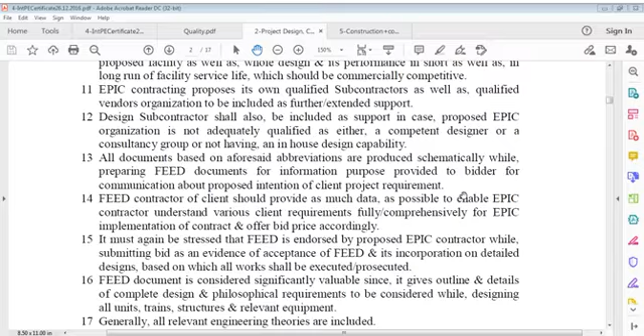As an engineer, as a designer, as a speaker, as a writer, I have authority on my education, I have authority to think on, I have authority to design, I have authority to accept myself, I have authority to amend that self, according to my caliber, according to my competency. I can go a long way, and that's why I say FEED and contract. Doesn't mean construction contracting. Contracting means design also. Contracting means art also. Contract means on which track I move with someone else.

Let's say a railway track, it has 2 rails, it has cross sleepers, and it's a system that works together, on which a very heavy train moves. Only if these are derailed can you say it's failure of that system, but until it works, it's a system. Both wheels of the bogie run on this track, and they can't be derailed while it works. Same way, a contractor, a designer or an owner, they all work on those tracks, and that is called a system.

So we should not think of it differently. We have to comprehend our views into contemplation. We have to comprehend our views that come out of thinking, thoughtful exercises, and they can be collectively called templates, though unpapered, not on paper. We can't read them, but we have to apply them.

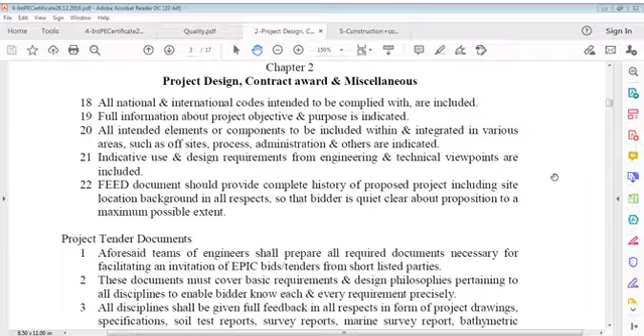So the FEED document should be comprehensive enough to communicate the message of what was wanted by those people who own this project, what they thought of, what was the contemplation, and this communication must be written somewhere, and direction of design must be given based on those elaborations, those writings or those contents. It's very much an issue.

So FEED cannot be taken for granted, and should not be, because FEED is front end. I say front end design, rather I should say front end engineering design, because engineering comes into play, though there can be pre-FEED, and that shall be the front end of design start. We have to give proper value to design, to the world of design, to time of design, to requirement of design. What is really required is this.

So these points we have to understand very well, and then we come to tender documents. It's also very important. Tender document. After all, why tender? My question is, why tender? And what is tender? Why do we need it? Why is tender required?

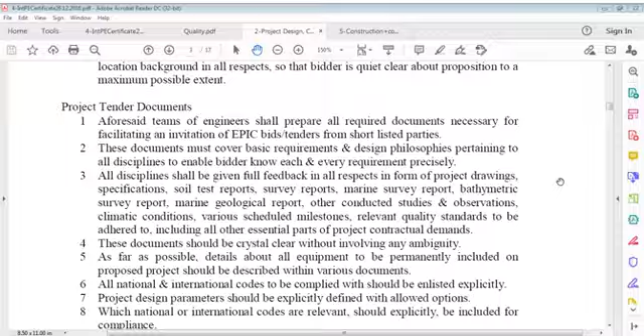These documents must cover basic requirements. That's what I say. These documents must cover basic requirements and design philosophies pertaining to all disciplines to enable the bidder to know each and every requirement precisely. Because if a bidder doesn't know the precise requirement, how can that person calculate cost on that? If our precise requirement is absent, this means that the bid document is defective, and we have to raise questions before these documents are accepted.

Bid is accepted. These documents must cover basic requirements as I have written and design philosophies pertaining to all disciplines to enable the bidder to know each and every requirement precisely, I mean to say completely. It should not be an indicative one, it should be expressed in a proper way. That's what I say. Bid document. Now, again I say these documents must cover basic requirements and design philosophies pertaining to all disciplines to enable the bidder to know each and every requirement very precisely.

All disciplines shall be given full feedback in all respects in the form of project drawings. Right? The drawings themselves are very big, voluminous. Even for a small building, you will find complete sets of drawings, architectural drawings. First of all, before architecture, there will be a site plan, location plan or layout plan as well.

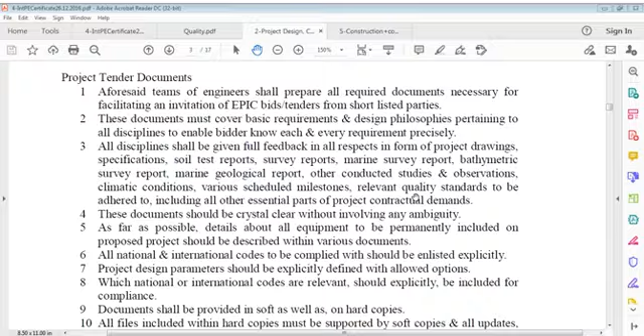These are all important points that those people can think about. And thinking is required. As I said, thinking is required, which is very, very important. Now, we say again, as the paragraph states, all disciplines shall be given full feedback.

All disciplines shall be given full feedback in all respects in the form of project drawings, specifications, soil test reports, survey reports, marine survey report, bathymetric survey report, marine geological report, other conducted studies and observations, climatic conditions, various scheduled milestones, relevant quality standards to be adhered to, including all other essential parts of project contractual demands.

These documents should be very crystal clear without involving any ambiguity. It is a must. Every document must be clear and relevant to the project requirement. I don't want to include useless documents. I don't want to include useless information. What is relevant is relevant. That's why having superficial documents has no meaning. You must have limited documents with complete information.

We should not leave any unclear, or you can say loose documents, which are not relevant to the project, and unnecessary increased volume should not be used. If you don't understand this point, we cannot compile documents. So these documents should be crystal clear without involving whatever level of ambiguity. That is not going to work at all.

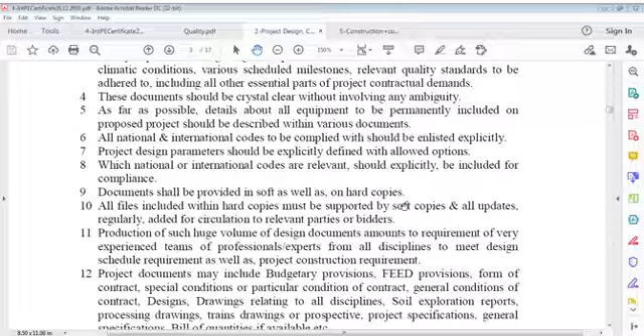So as far as possible, details about all equipment to be permanently included on the proposed project should be described within various documents. And of course, national and international codes are a must to be complied with, and these must be enlisted explicitly, that we will refer to these codes for whatever purpose. And project design parameters should be explicitly defined with allowed options. So which national and international codes are relevant should explicitly be included for compliance, and that compliance must be made a must. It's not simply written, it should be worked upon.

Documents shall be provided in soft as well as hard copies. That's very normal. All files included within hard copies must be supported by soft copies, and all updates regularly added for circulation to relevant parties or bidders.

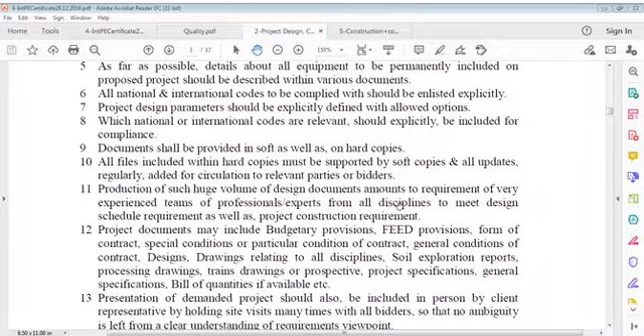Production of such a huge volume of design documents amounts to a requirement of a very experienced team of professional experts from all disciplines to meet design schedule requirements as well as project construction requirements. Production of such voluminous documents requires those professionals who can work upon this. Those professionals are engineers in general, engineers from all disciplines, to meet design schedule requirements as well as project construction requirements.

Project documents may include budgetary provisions. Yes, of course, budgetary provisions are a must. How can we move without budget provisions? No one can move. So project documents may include budgetary provisions, FEED provisions, because budget comes first, FEED comes second. Budgetary provisions, FEED or project provisions, and also others, I can say without any slip here.

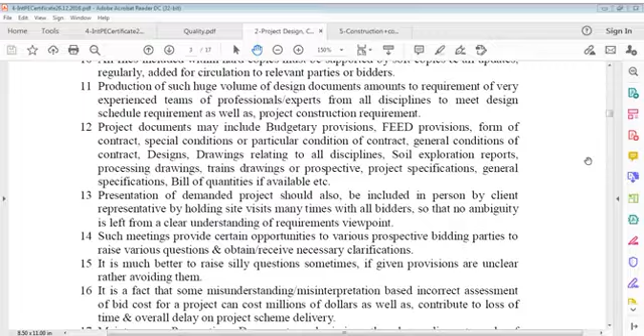Alright, now we can't stick to one point. We have to move further to soil exploration and others, and process drawings. Therefore, my dear friends, we can define very briefly what these are. Project documents may include budgetary provisions, FEED provisions, form of contract, special conditions or particular conditions of contract, general conditions of contract, designs, drawings in relation to all disciplines, soil exploration reports, process designs or drawings, trains drawings or prospective project, specifications, general specifications, bill of quantities if available, etc. Then we can go further.

Presentation of demanded project should also be included in person by client representative by holding site visits many times with all bidders so that no ambiguity is left from a clear understanding of requirements viewpoint. It should be a crystal clear presentation. There should be nothing left which the contractor doesn't understand. Contractor understanding must be very clear because it is that person who shall deliver to you your requirement. If that person is not clear, how can you get your requirement? So the contractor from this field understands this.

Presentation of demanded project should also be included in person by client representative by holding site visits many times with all bidders, so that no ambiguity is left from a clear understanding of requirements viewpoint, which is very important in such engineering. Such meetings provide certain opportunities to various prospective bidding parties to raise various questions and receive necessary clarifications.

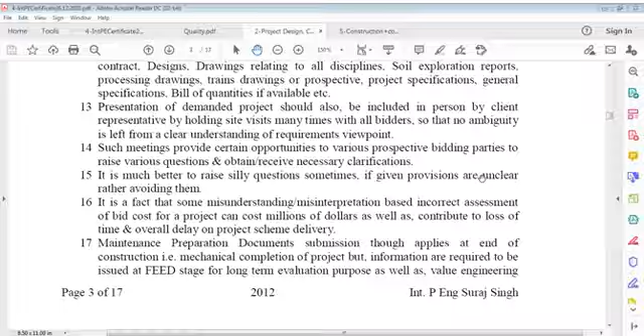Now, what do we say? We talk about contractors' obligations pertinent to maintenance preparation, general engineering and procurement, which the contractor shall take into account in its design of the proposed facility, its maintainability criteria, philosophy and requirements of spares to be defined in the proposed FEED design package.

What do you say? Obligations. What's the obligation of the contractor? Maintenance preparation, general engineering and procurement, which the contractor shall take into account in its design of the proposed facility, its maintainability criteria, philosophy and requirements of spares to be defined in the proposed FEED design package. Now, this is a very important point.

Important not from a construction point of view, but from an installation point of view, from the performance point of view of trains. This actually means trains and vessels. When we say maintenance preparation, mostly that means all equipment that you have to include within this project. A long list of equipment, very long and very expensive, whatever processing plant or furnace, and technology-related equipment, and we have to learn a lot about that, and you can learn a lot on this.

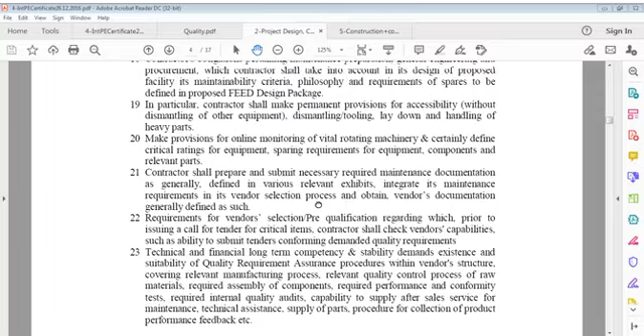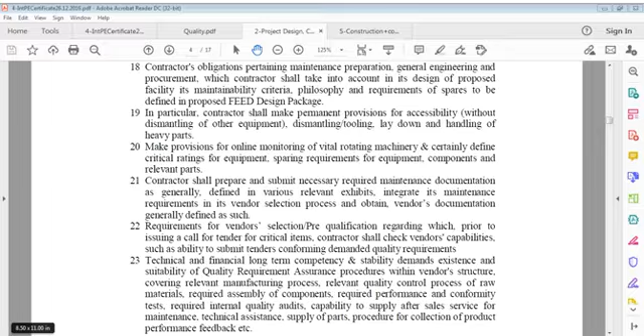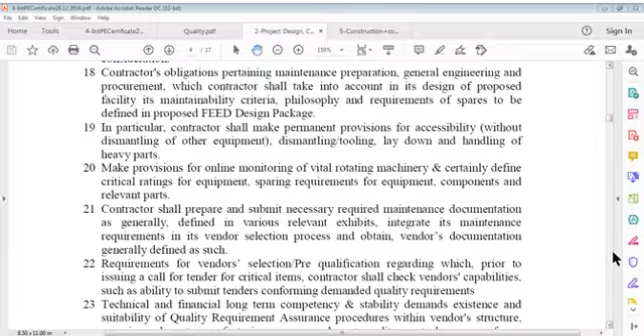Contractors' obligations pertaining to maintenance, preparation, general engineering and procurement, which the contractor shall take into account in its design of the proposed facility, its maintainability, criteria, philosophy and requirements of spares to be defined in the proposed FEED design package. Very important point.

Means maintenance, preparation, general engineering, procurement, which the contractor has to do according to the design of the facility, its maintainability, criteria, philosophy and requirements of spares, which all need to be defined in the design package. And permanent accessibility for maintenance without dismantling, without interfering in the process, and also where is laydown, handling of heavy parts. All this must be taken into consideration.

And of course, provisions for online monitoring of vital rotating machinery, certainly define critical ratings for equipment, sparing requirements for equipment, components and relevant parts. Contractor shall prepare and submit necessary required maintenance documentation as generally defined in various relevant exhibits.

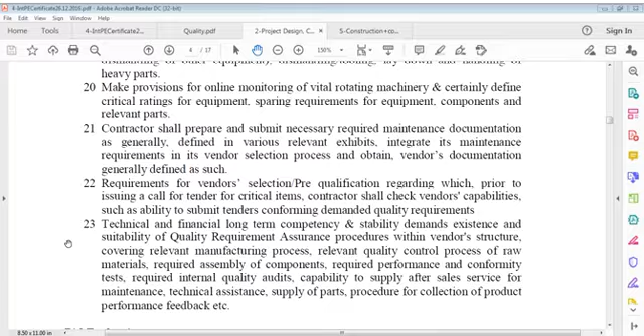Vendors' documents would tell, would advise, would suggest how to maintain, the complete process of maintaining, how to handle, how to operate, everything like that, in descriptive mode, explanatory mode, pointed mode, and all solutions: which problems may be faced by these equipments, what shall be the solutions, what shall be indicators of problems, as you find even in small equipment we buy these days, electronic equipment, electric equipment; we buy and we find this all written in a data sheet or catalog or literature.

Requirements for vendor selection, pre-qualification, regarding which prior to issuing a call for tender for critical items, contractor shall check vendors' capabilities such as ability to submit tenders conforming to demanded quality requirements. It's very important. Pre-qualification is a term, or you can say vendor's capability. Pre-qualification means we define criteria that the vendor should have. Just like normative references we define, minimum requirements we define, and these can be submitted in the form of pre-qualification, but that should be factual, it cannot be imaginary.

And of course, inspections and examinations can be done at various locations of the vendor, wherever the vendor works, whether it's offices, warehouses, factories, their design office and all that. This can be verified, inspected, assessed. And that requirement is very important.

Paragraph is requirements for vendor selection, pre-qualification, regarding which prior to issuing a call for tender for critical items, contractor or bidder shall check vendors' capabilities, such as ability to submit a bid conforming to demanded quality requirements, technical and financial long-term competency and stability, and existence and suitability of quality requirements.

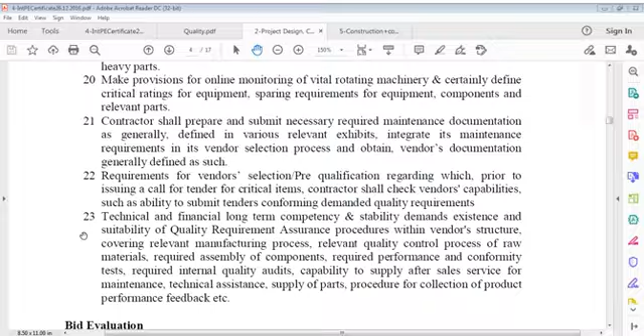These points are very important, meaning competency: technical competency, material competency, money competency, standard competency, requirement competency, quality competency, assurance competency, your structure competency meaning company structure, organizational structure, manufacturing process competency, quality control competency, quality requirement competency, quality standard competency, assembly competency, performance competency, conformity test requirements, internal quality audits, external quality audits, after sales services capability, technical assistance, supply of parts, procedure, collection of product performance feedback, etc.

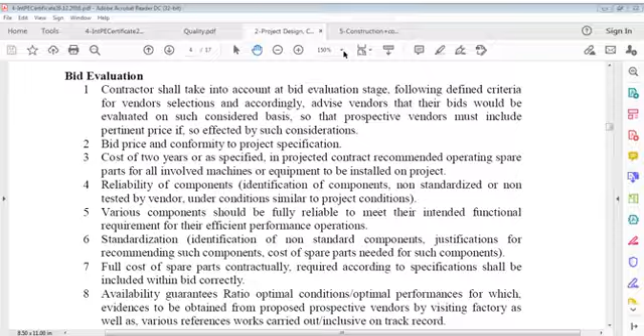Now, bid evaluation. What is bid evaluation? That is an important part. After all, it is a bid. It's not official. It's something secret, price-wise, and it's something very much technical. It's not price-wise alone. It's technical. And technical investigation is very much important. It's very difficult. It's very cumbersome. And it has to be analyzed.

Analysis of all documents. I'm not saying word by word, but effect by effect. Effect by effect means how does it affect this and that. That point is very important. Quality everywhere. We have to make sure that quality is everywhere, meaning in these documents also. These documents are based on certain design, certain views, performance, time, reliability, analysis, thinking, and that works there. And of course, it is related to certain construction projects, organizational management.

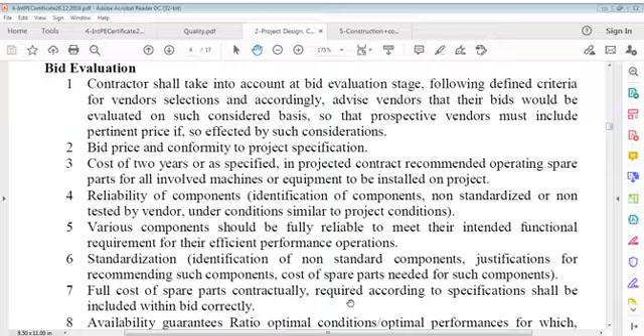Bid price and conformity to project specifications. Now, cost of 2 years or as specified in projected contract recommended operating spare parts for all involved machines or equipment to be installed on project. Reliability of components. Identification of components non-standardized or non-tested by vendor.

Bid price and conformity to project specification and cost of 2 years spare parts. Reliability of components means identification of components non-standardized or non-tested by vendor under conditions similar to project conditions. Various components should be fully reliable to meet their intended functional requirements for their efficient performance operations.

Standardization is identification of non-standard components, justifications for recommending such components, cost of spare parts. You can say standardization, identification of non-standard components, and justifications for recommending such components, cost of spare parts needed for such components, full cost of spare parts contractually required according to specifications.

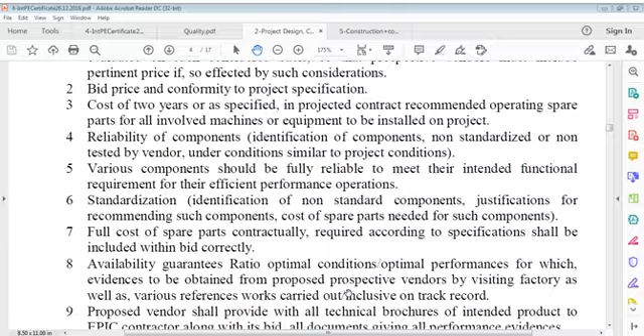And availability guarantee ratio, optimal conditions, optimal performances, for which evidence to be obtained from proposed prospective vendors by visiting factory, as well as various reference works carried out inclusive of track record.

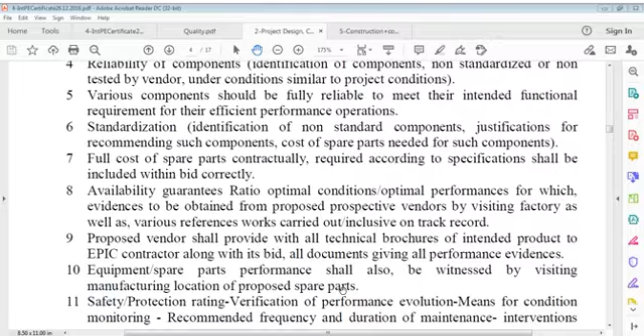Proposed vendor shall provide all technical brochures of intended product to EPIC contractor. Now we can fill in again. Proposed vendor shall provide all technical brochures of intended product to contractor along with its bid. All documents giving all performance evidences, equipment, spare parts, performance shall also be witnessed by visiting manufacturing location of proposed spare parts.

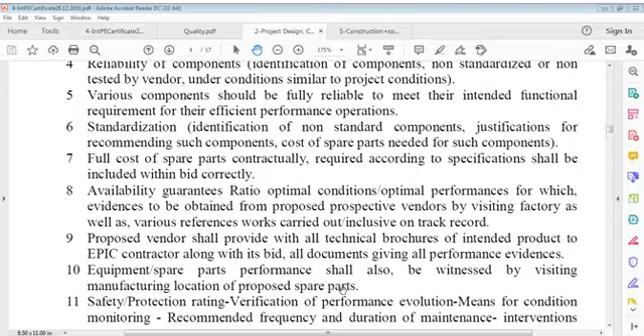Safety protection rating, verification of performance, evaluation, means for condition monitoring, recommended frequency and duration of maintenance interventions, total annual duration, maximum duration of major intervention.

Similar records should be confirmed from available database of past successful projects, on history of vendor's track record, and included within submission to contract engineer as an evidence to monitor proposed product efficiency.

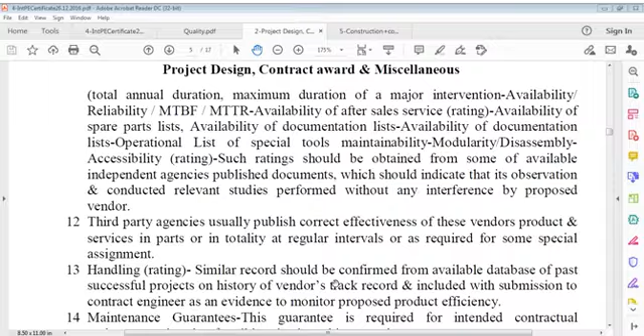So we can say maintenance guarantee. After handling rating we have to talk of maintenance guarantee. This guarantee is required for intended contractual maintenance duration for all involved machines, equipment, etc.

Then we may say maintenance guarantee. This guarantee is required for intended contractual maintenance duration for all involved machines, equipment, etc.

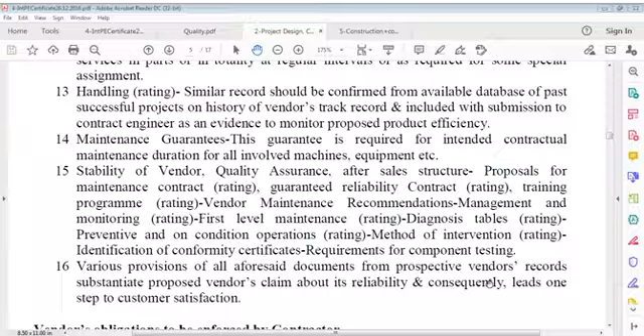Let us say one by one again. Handling, maintenance guarantees, stability, etc. And before handling, third-party agencies. Third-party agencies usually publish correct effectiveness of these vendors. Here we are. Yes, right.

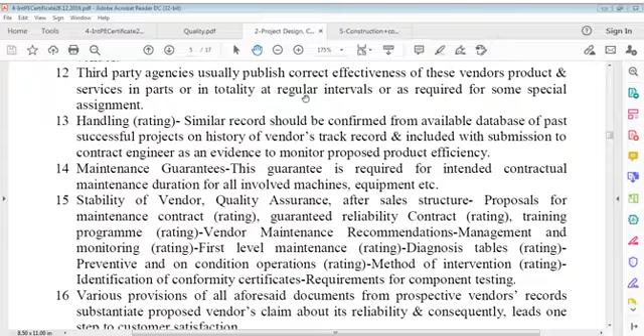Now, maintenance guarantees. This guarantee is required for the intended contractual maintenance duration for all involved machines, equipment, etc. Stability of vendor, quality assurance, after-sales structure, proposals for maintenance contract rating, guaranteed reliability contract rating, training program rating, vendor maintenance recommendations, management and monitoring, first level maintenance rating, diagnosis tables, ratings and

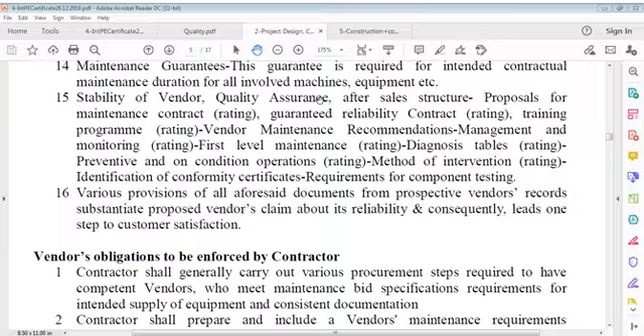preventive and on-condition operations ratings, method of intervention ratings, identification of conformity certificates, requirements for components testing. Various provisions of all aforesaid documents from prospective vendors' records substantiate the proposed vendor's claim about its reliability and consequently lead one step to customer satisfaction.

Vendor's obligations to be enforced by contractor. Contractor shall generally carry out various procurement steps required to have competent vendors who meet maintenance bid specifications, requirements for intended supply of equipment, and consistent documentation.

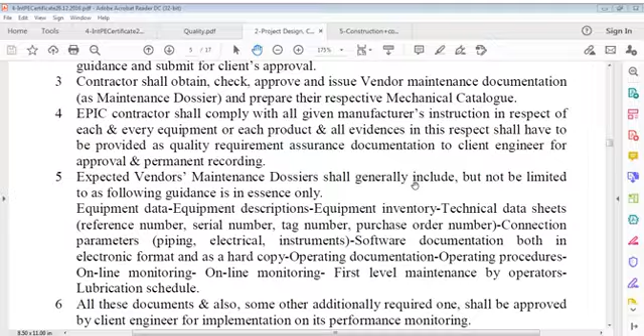Expected vendors' maintenance dossiers shall generally include but not be limited to the following, as guidance in essence only: equipment data, equipment descriptions, equipment inventory, technical data sheets, reference number, serial number, tag number, purchase order number, connection parameters, piping, electrical instruments, software documentation both in electronic format and as hard copy, operating documentation, operating procedures, online monitoring, first level maintenance by operators, lubrication schedule.

I repeat. Expected vendors' maintenance dossiers shall generally include but not be limited to the following, as guidance in essence only: equipment data, equipment description, equipment inventory, technical data sheets, reference number, serial number, tag number, purchase order number, connection parameters, piping, electrical instrumentation, software documentation both in electronic format and as a hard copy, operating documents, operating procedures, online monitoring, first level maintenance by operators, lubrication schedule.

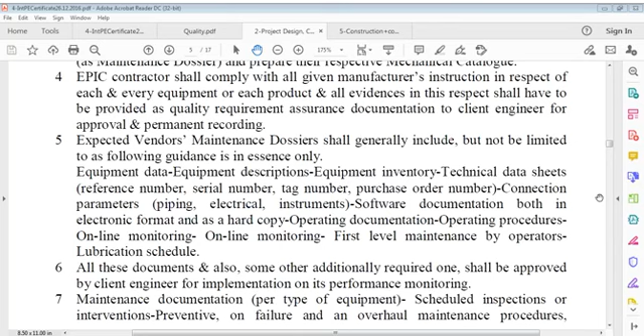All these documents and also some other additionally required ones shall be approved by the client engineer for implementation on its performance monitoring. Maintenance documentation: per type of equipment, scheduled inspections or interventions, preventive, on-failure and overhaul maintenance procedures, including description of personnel, tools, spare parts, drawings, required troubleshooting charts,

list of consumables, list of special tools, spare parts list (SPL) under format attached or equivalent, and drawings: general arrangement, section drawing, schematic and wiring drawings, control loop drawings, logic diagrams, cause and effect sheets. All these documents shall be properly numbered and recorded by the EPIC Document Center.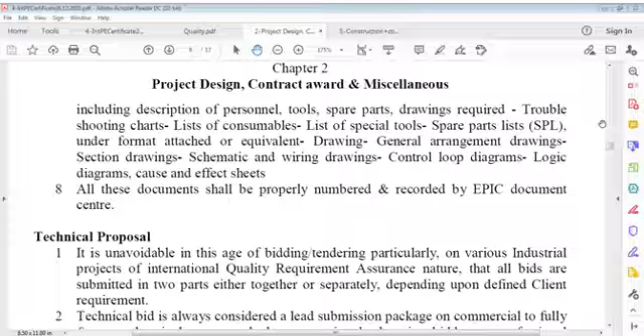Let us repeat this very important one, because this is related to vendors' obligations to be enforced by contractor, what vendors require, and these are various issues related to equipment, the requirements.

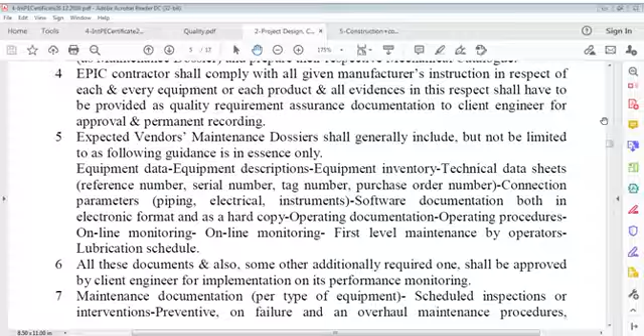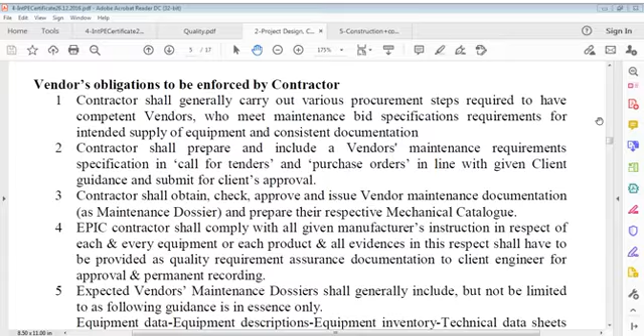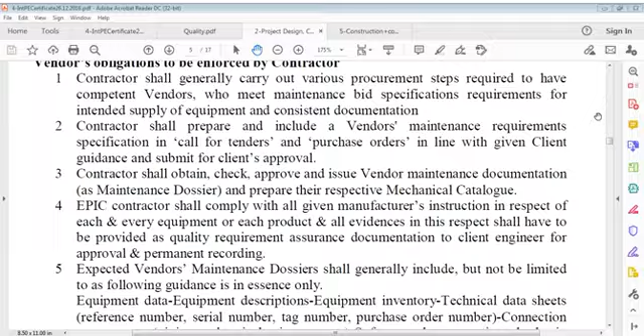It's a very important point in this case, and I'll speak only on one point, not all. It says in this case, I'll just read: the contractor shall generally carry out various procurement steps required to have competent vendors who meet maintenance bid specification requirements for the intended supply of equipment and consistent documentation. Contractors shall prepare and include a vendor's maintenance requirements specification in calls for tenders and purchase orders in line with given client guidance and submit for client's approval. Contractors shall obtain, check, approve, and issue vendors' maintenance documentation as maintenance dossiers and prepare their respective mechanical catalog.

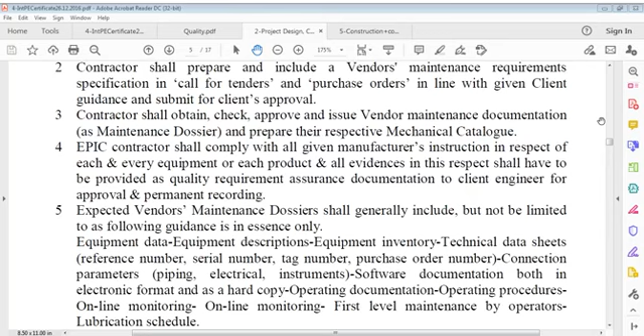EPIC contractors shall comply with all given manufacturer's instructions in respect of each and every equipment of each product, and all evidences in this respect shall have to be provided as quality requirement assurance documentation to client engineer for approval and permanent recording. Expected vendors' maintenance dossiers shall generally include but not be limited to the following, in its essence only: equipment data, equipment descriptions, equipment inventory, technical data sheets, reference numbers, serial number, tag number, purchase order number, connection parameters, piping, electrical, instruments, software documentation both in electronic format and as hard copy, operating documentation, operating procedures, online monitoring, first level maintenance by operators, lubrication schedule. All these documents, and some other additionally required ones, shall be approved by the client engineer for implementation and performance monitoring.

Maintenance documentation per type of equipment, scheduled inspection or intervention, preventive, on-failure, and overhaul maintenance procedures, including description of personnel, tools, special parts, spare parts, drawings required, troubleshooting charts, list of consumables, list of special tools, spare parts list under the format attached or equivalent, drawings: general arrangement drawings, section drawings, schematic drawings and wiring drawings, control loop diagrams, logic diagrams, cause and effect sheets. All these documents shall be properly numbered and recorded by the EPIC Document Center.

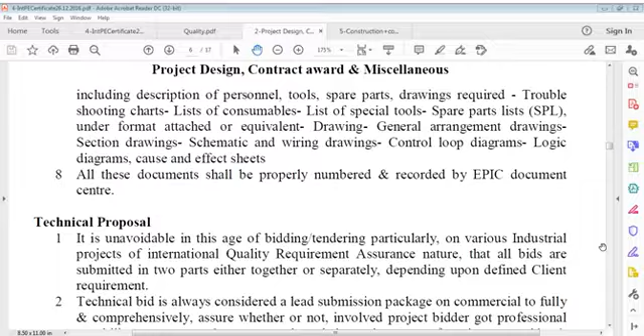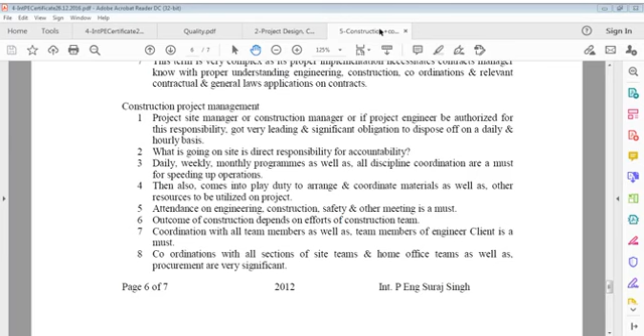The third important part here is the technical proposal, which is, you can say, the foundation of this type of contract. Before this, I would like to say construction control, which is also

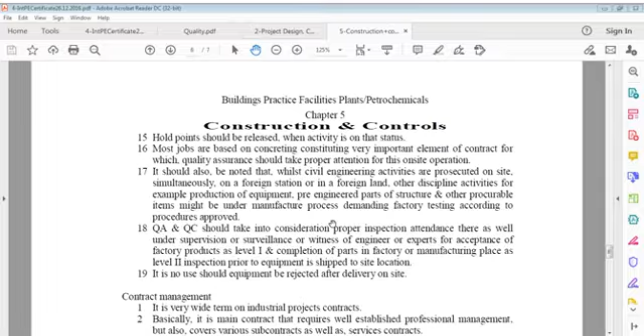I actually wanted to discuss this, but there's some obstruction coming in. We'll take care of this as well, no problem.

So first let's go to the technical proposal, which is very important from each and every point of view. The technical proposal is very, very important for contractors, for tenderers, for project engineers, and for owners, for all. Without having a competent technical proposal, nothing can be relied upon. To be very frank, nothing can be relied upon.

Now, it's unavoidable in this age of bidding and tendering, particularly on various industrial projects of international quality requirement nature, that all bids are submitted in two parts, either together or separately, depending upon the defined client requirement, and the technical proposal is the lead document. The commercial bid can also be submitted with it, but even if it is, it has no meaning until the technical proposal is finalized. Even though commercially you are suitable, if technically you are not suitable, you are not eligible for the commercial bid. This is the entire meaning of that.

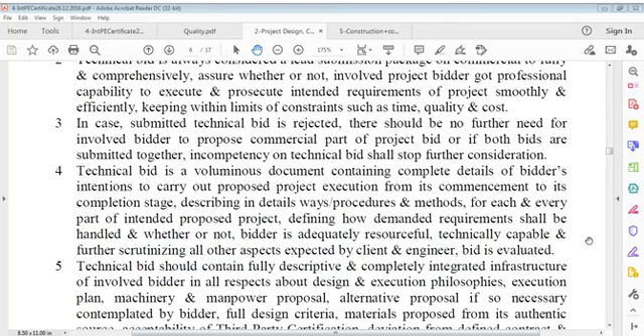In case the submitted technical bid is rejected, there should be no further need or requirement for the involved bidder to propose the commercial part of the project bid, or if both bids are submitted together, incompetency on the technical bid shall stop further consideration. Technical bid is a voluminous document, and if submitted through soft copies, it's a big memory document.

Technical bid is a voluminous document containing complete details of bidders' intentions to carry out the proposed project execution from its commencement to its completion stage, describing in detail ways, procedures and methods for each and every part of the intended proposed project, defining how demanded requirements shall be handled

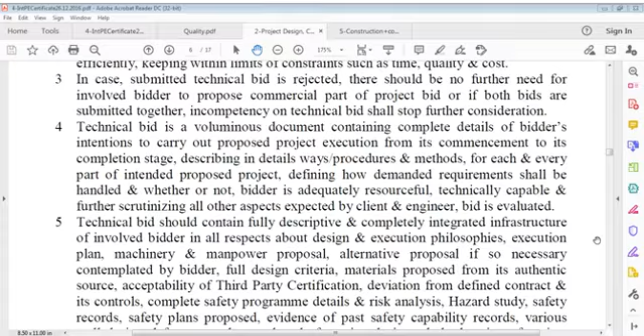and whether or not the bidder is adequately resourceful, technically capable, and further scrutinizing all other aspects expected by client and engineer. Bid is evaluated. Technical bid. Technical bid should contain fully descriptive and completely integrated infrastructure of the involved bidder.

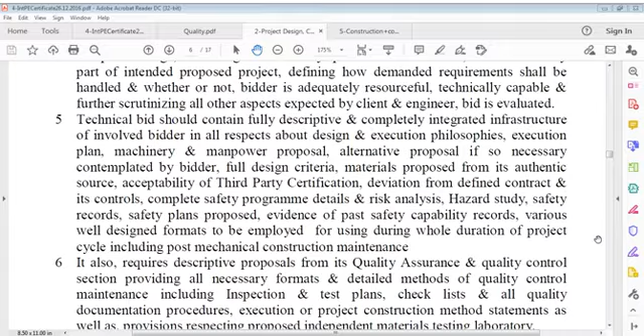Fully descriptive and completely integrated infrastructure of the involved bidder in all respects about design and execution philosophies, execution plan, machinery and manpower or workforce proposal. Alternative proposal, if so necessary, contemplated by bidder, full design criteria, materials proposed from its authentic source, acceptability of third-party

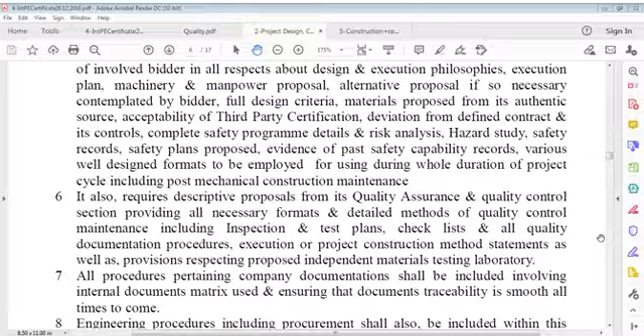certification, deviation from defined contract and its controls, complete safety program details and risk analysis, hazard study, safety records, safety plans, proposed evidence of past safety capability, records and various well-designed formats to be employed during the whole duration of the project cycle, including post mechanical construction maintenance.

It also requires descriptive proposals from its quality assurance and quality control section, providing all necessary formats and detailed methods of quality control, maintenance, including inspection and test plans, checklists, and all quality documentation procedures. Execution or project construction method statements as well as provisions respecting the proposed independent materials testing laboratory.

All procedures pertaining to company documentation shall be included, involving internal document matrix used and ensuring that document traceability is smooth at all times to come. Engineering procedures including procurement shall also be included within this proposal, giving complete feedback on the proposed designing system, software to be used, designer's potential, complete requirement of job related materials, job temporary facility to accommodate proposed manpower, etc.

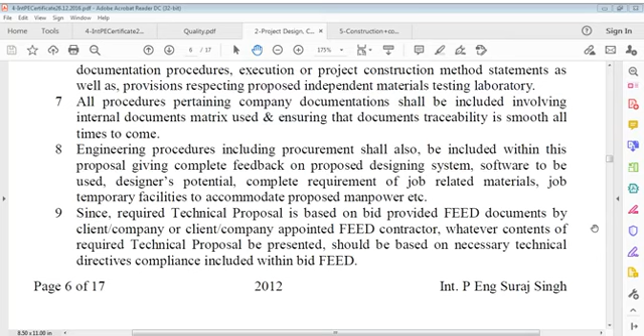Since the required technical proposal is based on bid-provided FEED documents by the client company or the client company appointed FEED contractor, whatever contents of the required technical proposal are presented should be based on necessary technical directives and compliance included within the bid FEED. Bidders' base firm proposal should not at all deviate from bid FEED requirements. Means the original bid should not deviate from FEED requirements.

A competent bidder is required to endorse the submitted technical bid stating that the given bid is completely based upon the provided FEED, meeting all requirements unconditionally without involving any qualifications. Its content of certification should be in accordance to the client format provided.

There may be an alternative proposal in addition to the bidder's firm proposal, which may satisfy all requirements of FEED in addition to contributing cost and time saving to the client according to defined value engineering considerations, that the owner client could accept if all proposals comply with provisions included within FEED.

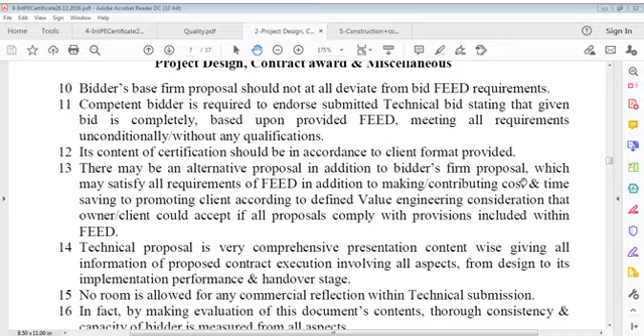Technical proposal should be a very comprehensive presentation content wise, giving all information of proposed contract execution involving all aspects from design to its implementation, performance and handover stage. No room is allowed for any commercial reflection within technical submission.

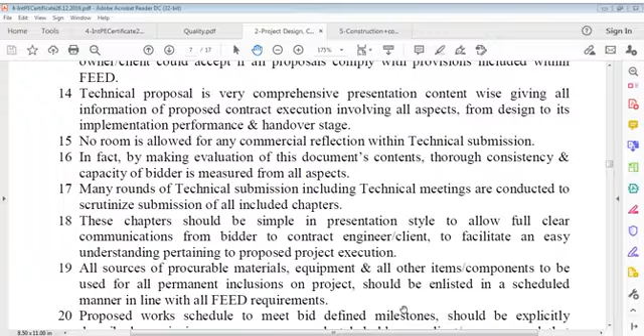In fact, by making evaluation of this document's contents, thorough consistency and capacity of the bidder is measured from all aspects. Many rounds of technical submission, including technical meetings, are conducted to scrutinize submission of all included chapters. These chapters should be simple in presentation style to allow full clear communication from bidder to contract engineer or client, to facilitate an easy understanding pertaining to proposed project execution.

All sources of procurable materials, equipment and all other items and components to be used for all permanent inclusions on the project should be enlisted in a scheduled manner in line with all FEED requirements.

Proposed works scheduled to meet bid defined milestones should be explicitly described, convincing everyone concerned, stakeholders and client company, that the bidder approach is feasible to achieve indicated or defined targets in practical terms, so that commissioning of the facility shall move smoothly without causing any problems.

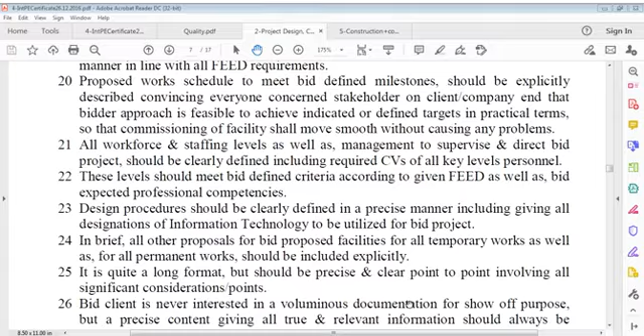All workforce and staffing levels as well as management to supervise the bid project should be clearly defined, including required CVs of all the personnel. These levels should meet bid defined criteria according to the given FEED as well as bid expected professional competencies.

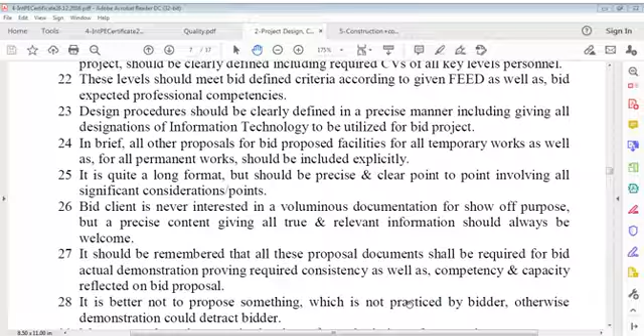Design procedures should be clearly defined in a precise manner, including giving all designations of information technology to be utilized for the bid project. In brief, all other proposals for bid proposed facilities for all temporary works as well as for all permanent works should be included explicitly.

It is quite a long format, but should be precise and clear, point to point, involving all significant consideration points. The bid client is never interested in voluminous documentation for show purposes, but a precise content giving all true and relevant information should always be welcome.

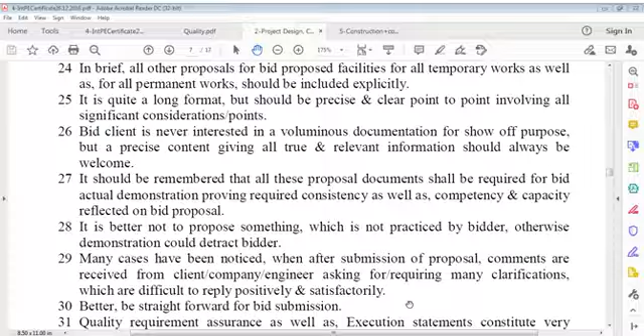It should be remembered that all these proposal documents shall be required for actual demonstration, proving required consistency as well as competency and capacity reflected in bid proposals. It's better not to propose something which is not practiced by the bidder. Otherwise, demonstration could detract the bidder. Very important point.

Many cases have been noticed when, after submission of the proposal, comments are received from the client company engineer requiring many clarifications, which are difficult to reply to positively and satisfactorily. Better be straightforward for bid submission.

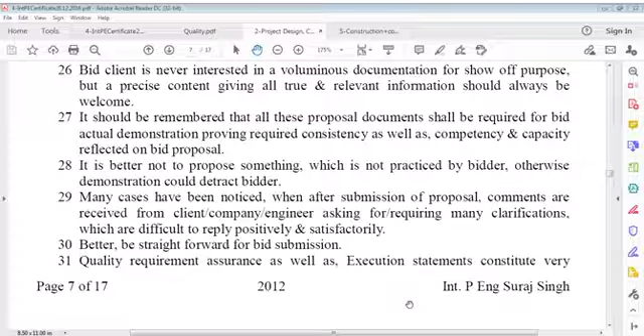Quality requirement assurance as well as execution statements constitute a very important and significant role for providing value to the project technical bid, for which due time and devotion must be given by the proposed bidder. Relevant experts should be engaged for detailed inclusion of all necessary information within bid documents for engineer, company, client consideration and review. Untoward information should be preferably avoided.

Once the project bidder is shortlisted, either by client or company engineer or by project establishment, a bid competency call for its commercial presentation should be given to the bidder, failing which there is no use in case the submitted bid fails to meet project FEED requirements.

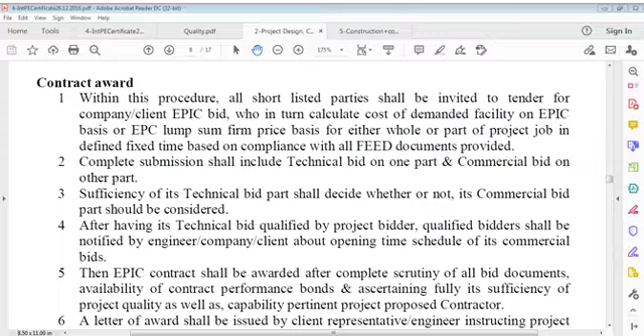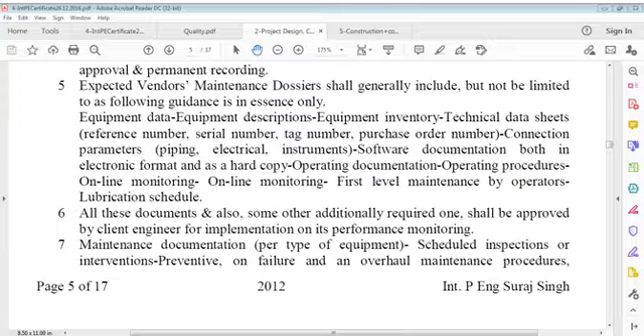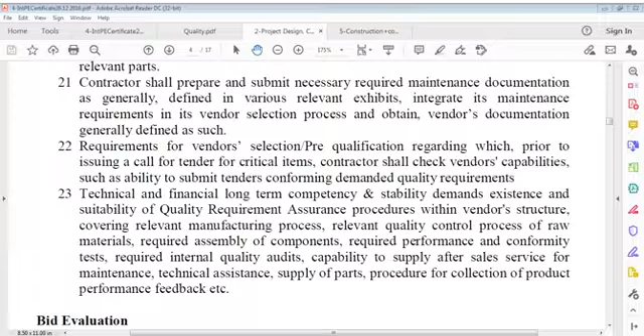We can say here, why does it go down? We're just talking about the technical proposal, and before that we talked about vendors' obligations to be enforced by the contractor, and before that bid evaluation, and documents. In this file we talked about abbreviations first. There is project design, contract award, miscellaneous. Then with evaluation we started, which is a very important one. Before this we had FEED documents.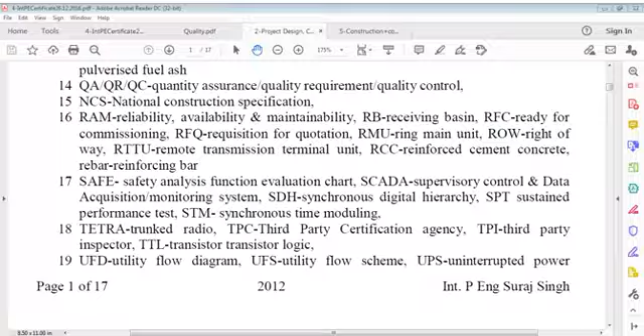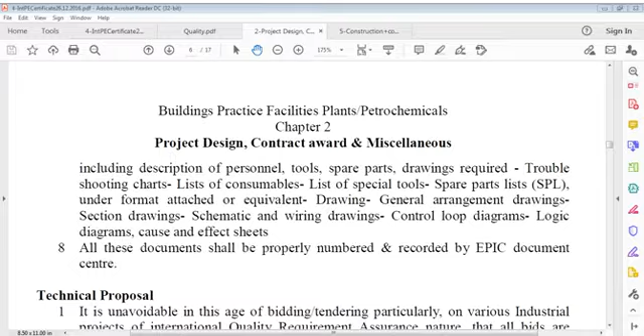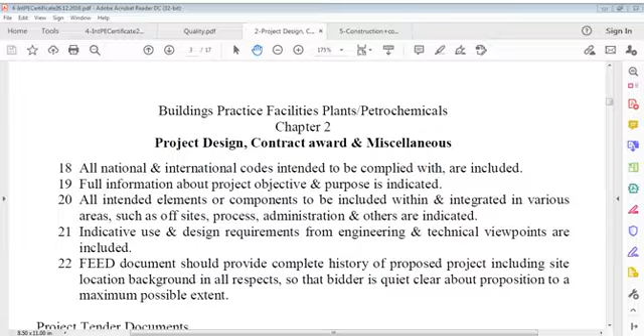It doesn't go further. It goes like this, I think. Like that. Okay.

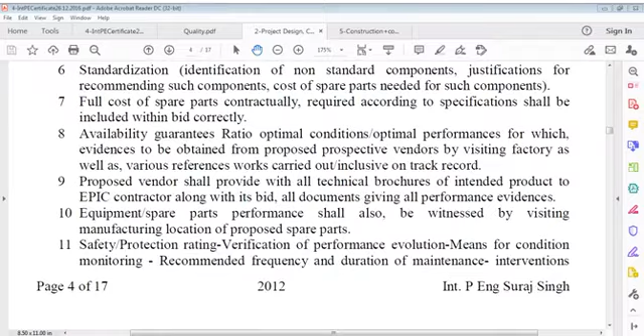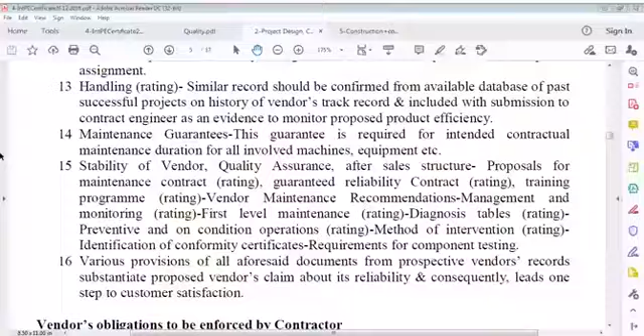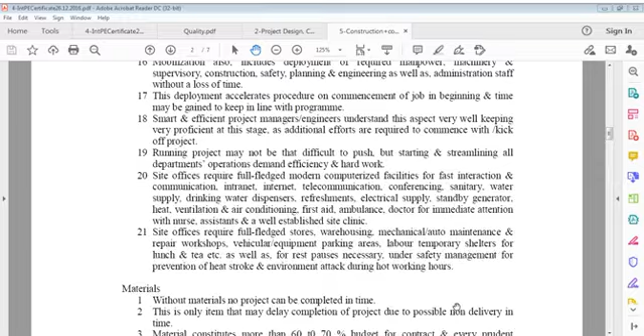We had project tender documents, then bid evaluation. All these we discussed carry important meaning for selection of people, selection of contractors, selection of parties which have real weight in life. You have to understand that very well. And also construction controls, which will look into mobilization, materials, manpower, workforce, equipment, how we do that. These controls we have to discuss too.

Construction and controls are very interrelated sections for successful completion of a project. Design may be considered oversafe or optimum, but real construction involves actual expenses, contract time, and reputation. It should be the motto of an organization to apply good controls on the project to keep it on line, on schedule, with planning an actual part of controls.

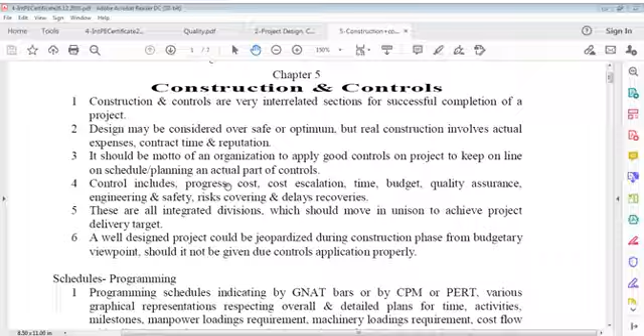Control includes progress, cost escalation, time, budget, quality assurance, engineering and safety, risks covering, and delays recoveries. These are all integrated divisions which should move in unison to achieve the project delivery target. A well-designed project could be jeopardized during the construction phase from a budgetary viewpoint, should it not be given due controls properly.

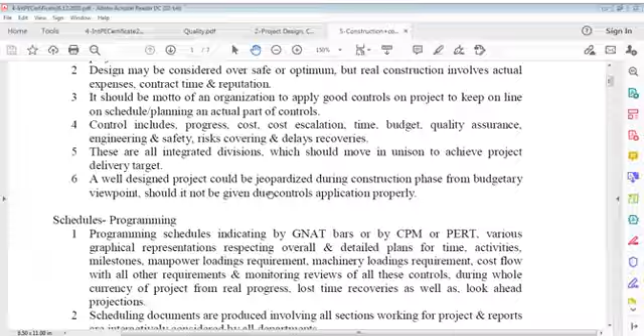Schedules programming, it's a very important one. It's not easy. Programming schedules indicated by Gantt bars or by CPM or by PERT. Various graphic representations of overall and detailed plans for time, activities, milestones, workforce loadings, machinery loadings, cost flow, with all other requirements, and monitoring reviews of all these controls during the whole currency of the project, from real progress, lost time recoveries, as well as look-ahead projections.

Scheduling documents are produced involving all sections working for the project, and reports are interactively considered by all departments. Planning engineers or project control engineers work on such activities dedicatedly on the project, reporting on a day-to-day, time-to-time basis.

Planning activities commence from day one of commencement to final completion, while documents are produced from level 1 to maybe level 5 depending on project or contract specification requirement. Generally, Primavera or MS Project softwares are used for producing professional documentation for planning purpose.

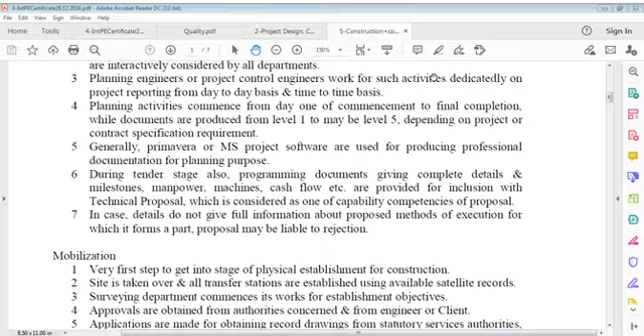During tender stage, also programming documents giving complete details and milestones, manpower, machines, cash flow, etc. are provided for inclusion with technical proposals, which is considered as one of the capabilities, competency of proposals. In case details do not give full information about proposed methods of execution for which it forms a part, the proposal may be liable to rejection.

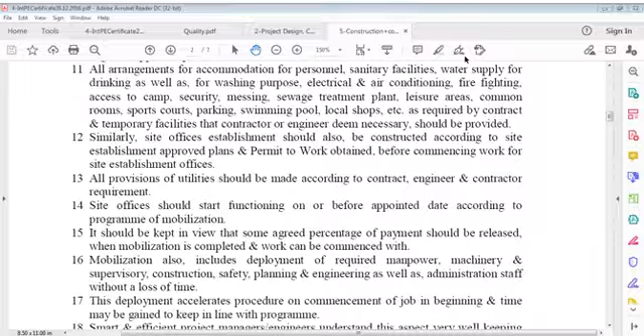Mobilization is a step which is a very important one. Let us talk of this if we can have 5-10 minutes here. So it's a long one, but let us see. Mobilization, how to mobilize a new site or work. The new site for you may be an old one for others, but you have to start with it, and that's an important point to consider. How to do it? That's the point we have to see.

You can see the very first step to get into the stage of physical establishment for construction, and that is mobilization. Establishment for construction: you have to make some basis on site for construction works to carry on. You have to take the site, and all transfer stations are established using available satellite records. Surveying department commences its work for establishment objectives. Approvals are obtained from concerned authorities, from engineer or client.

Applications are made for obtaining record drawings from statutory service authorities, if so required. Applications are also made to operating authorities for issue of all record drawings, if so required, for permits. Permit to work is required prior to commencement of an excavation in hot and cold work areas. No excavation is allowed in projects until these are permitted.

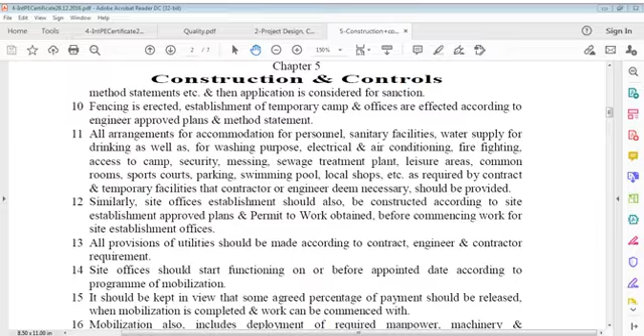There are so many points we have to consider in this regard, we'll talk of them later on, because mobilization is very important. You cannot simply say it's done. So much is to be done in that. We'll take care of that now. I think time is the essence here. Already 2:42, we have to cover something more. I'm just going to talk to you about this. It's written there, and we'll speak about that.

But the important point is what we understand as construction control sense. Construction is such a field where everybody has a different approach. Every engineer has a different approach. What I think, maybe you don't think. My experience may be different than yours. Your experience may be much more important than mine. Both cases are there.

And there are people who are planners, and they plan their way, maybe having enough experience, adequate experience, or they may not be having any experience. But because they know how to operate charts, how to operate this software, MS Project or Primavera or something else, they think they can plan. That's the conception in them. Young planners, I've seen young planners who have never worked on sites, never worked on projects, but they say, we know, we can construct.

The question arises: pragmatism, application of pragmatism. And what is pragmatism? Pragmatism means you must have understandable experience, proven experience, and you must utilize that experience for further activities. Experience may be good or bad. It may be applicable or not applicable. But proven experience can't be wrong. You have delivered projects, you must have full confidence. You are a person who has done it. So you are the author of your experience. You can now do authorship work.